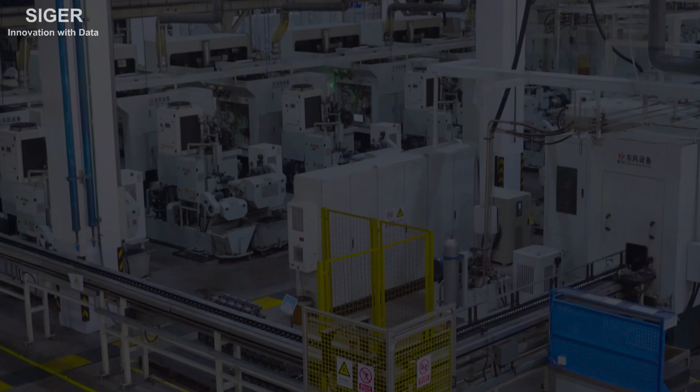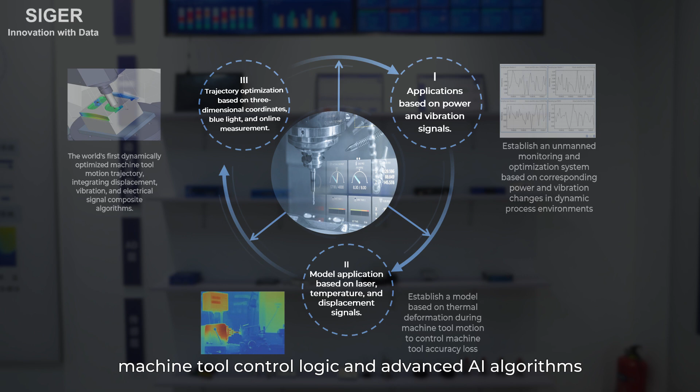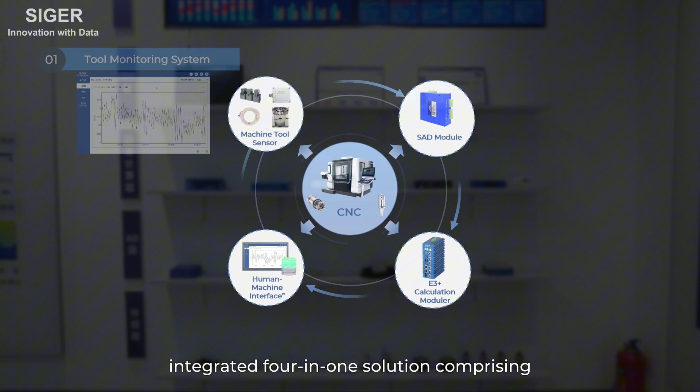Suzhou, a well-known manufacturing base in China, is home to SIGER Data, which has served tens of thousands of machine tools. By integrating multi-dimensional sensing, machine tool control logic, and advanced AI algorithms, based on a hardware and intelligent algorithm platform, the system has constructed an integrated 4-in-1 solution comprising the tool monitoring system, tool collision protection system, adaptive machining system, and thermal error compensation system.

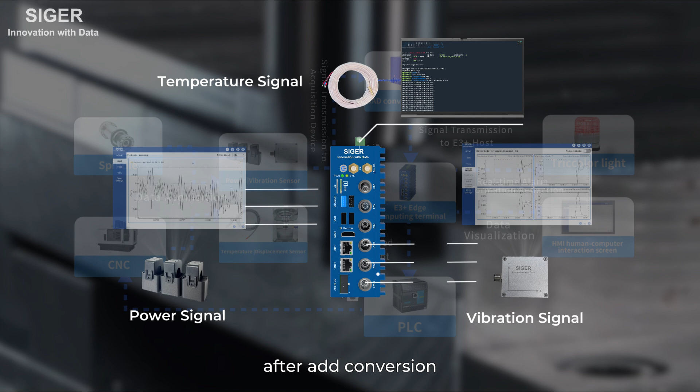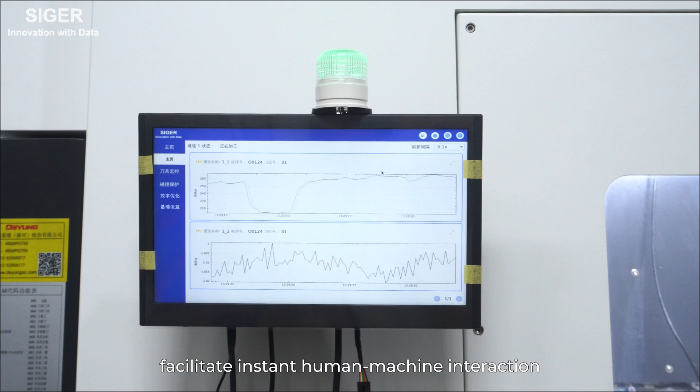At the perception layer, multiple sensors collect power, vibration, temperature, and displacement signals simultaneously. After AD conversion, the E3 Plus Edge computing terminal processes these multi-dimensional signals, enabling a real-time judgment system for machine tools. Independent alarms and an operation screen facilitate instant human-machine interaction and early warning, safeguarding machining accuracy and product quality.

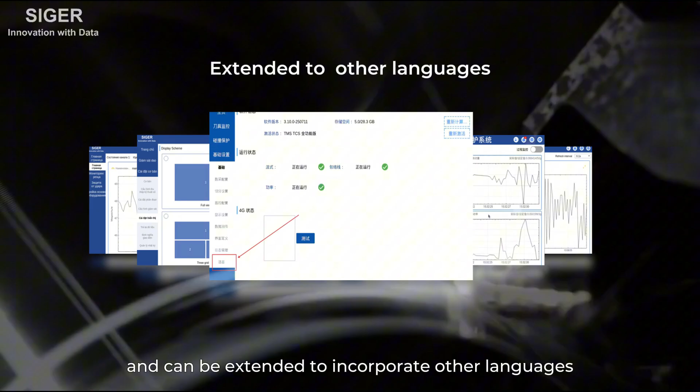Moreover, the system supports multi-language versions including English, Chinese, Russian, and Vietnamese, and can be extended to incorporate other languages. SIGER Data's products have obtained multiple global authoritative certifications, with its technical prowess recognized by the industry. It has served over 1,000 manufacturing enterprises across 20+ sectors.